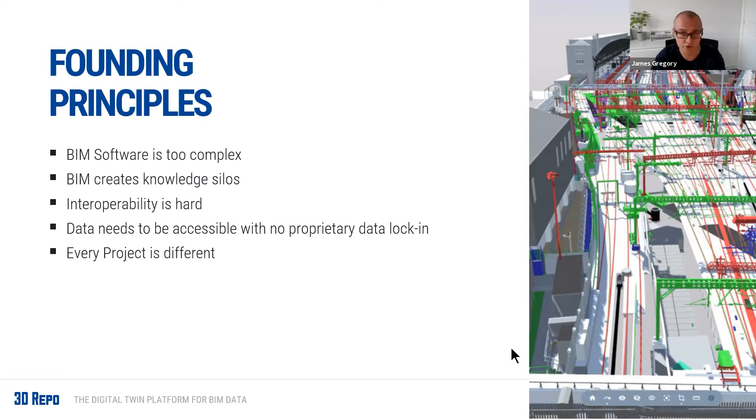Moreover, we see every project is different, but we need to be able to make simple decisions using simple solutions about different types of projects, whether it's rail, road, buildings, or infrastructure. Every project has a different set of requirements and different needs, so we want to provide a simple communication and collaboration platform for all users on all types of projects. The 3D Repo platform is built with three core solutions.

The first of which is PlanBase. PlanBase is primarily used at early stage design and planning. It provides a web-based environment for 3D assets, should they exist at that stage, to be opened up to communities for review, comment, and whatever is needed at that sort of early stage of a given project.

3D Repo IO. This is our core offering and what we're going to talk about in more detail today.

So I'm going to leave the slides regarding 3D Repo IO for a few moments.

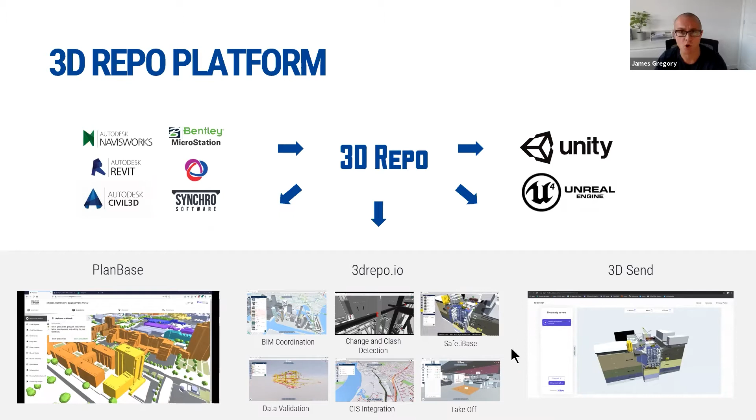3D Send is another one of our core products. It's a free to use application, jump on our 3D Send site today. It enables users to share BIM models and BIM files in a fully secure and encrypted way, and also provides the recipient with a simple free to use model viewer. It's a great way to share models and enable other parties to view them quickly. We're also able to push our data through to engines such as Unity and Unreal, which opens up an unlimited amount of possibilities for what can be done with that BIM data in those different solutions.

As I've mentioned, being open and collaborative is really important to us. Our Open Web Service API is modern and has been connected to a number of different platforms and systems - you can see a plethora of those below. As long as the software vendor at the other end has a good API and is prepared to open it and work with us, we've not seen software come across our desk yet that we've not been able to connect into. So if you need to connect data to other platforms via 3D Repo, that's bread and butter for us and what we're trying to deliver here.

So data consumption - how do we get data into 3D Repo? There are three core solutions or workflows to bring data in. The first is with our plugins. We have most of the main authoring tools that you guys are using and are familiar with, so if you've got these platforms, download the plugins and you can push data directly into 3D Repo from that authoring solution.

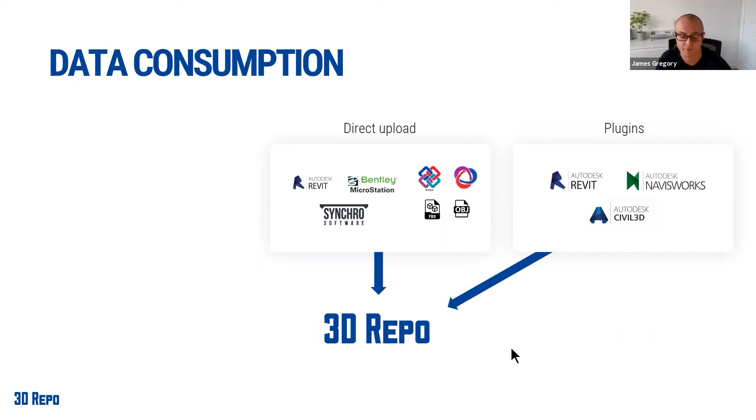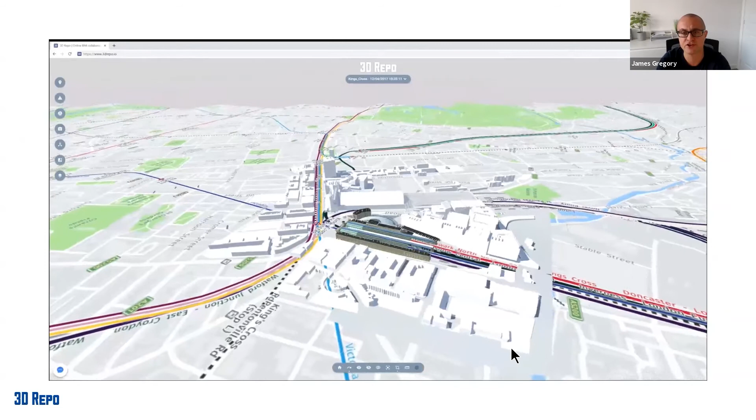Okay, so a little bit about the software. This slide gives you an overview and a simple insight into the user interface - nice and simple. We've tried to get as much of the model on screen as possible to make it interactive for users. Down the left-hand side we have the different modules within 3D Repo, and across the bottom we have the navigation commands, which I'll talk about on the next slide. I'm hoping that's not too jittery on your end - it's nice and crisp on my end. We've got quite a few attendees in the room, so there's maybe quite a lot of strain on the bandwidth, but I'm hoping that wasn't too stuttery.

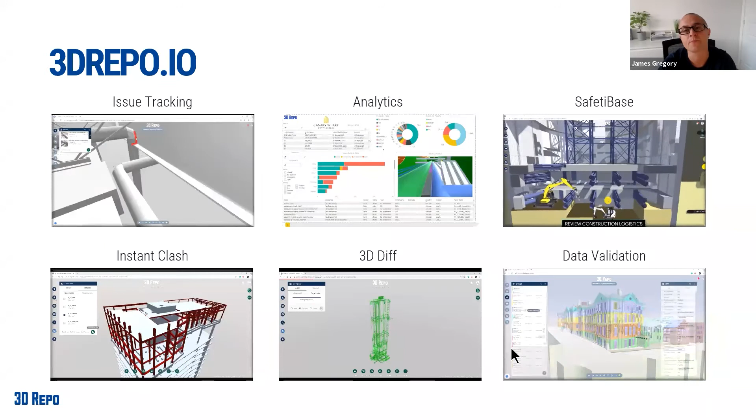Okay, so 3D Repo IO, our core offering. Here are some of the different modules and things you can do within the 3D Repo platform. Issue tracking for communicating issues is fundamental to us. The ability to clash detect models - bring native models into 3D Repo, federate those models together, and understand where there are clashes within them. We can then use the issue tracker to communicate those issues out to different disciplines and parties to resolve. Our 3D diff module enables different revisions of models to be compared - what's new, what's changed, what's been removed, what's been added - and we can see that in a nice graphical interface.

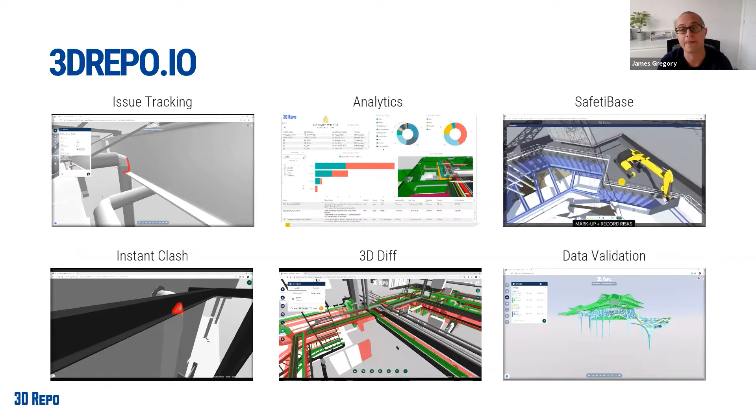Our data validation solution enables the data within our models to be validated, finding issues that may exist within those data sets compared to the standards and requirements, and communicating those issues out via our issue tracking solution. All of this feeds directly into analytical platforms - here you can see some Power BI dashboards consuming data from the different modules within the 3D Repo IO platform. Now, SafetiBase is where we're going to spend most of today's session, and I'll talk about that in a few slides' time. Security is very important to us - we are ISO 9001 and 27001, and we also hold Cyber Essentials.

I believe we're the only BIM software vendor to hold all 3 of those accreditations. Moreover, all of our software is developed here in the UK, and all of our data is primarily hosted here in the UK. I'll talk about hosting a little bit now.

3 options: we can host in our London AWS environment, which is our standard offering. We do have servers in Montreal for customers within those regions. Alternatively, we can install or deploy 3D Repo into any cloud provision, be that AWS, Google, or Microsoft Azure. We can also offer an on-premise solution in an air-gapped server environment, should you so wish.

Some of our customers range from clients to principal contractors, design teams, engineering firms. So if you guys fall into any of these categories, reach out to us. We can talk about the work we're doing in these spaces and see whether there's synergy with your company, your processes, and your workflows. Okay, so let's now spend a bit of time on SafetiBase.

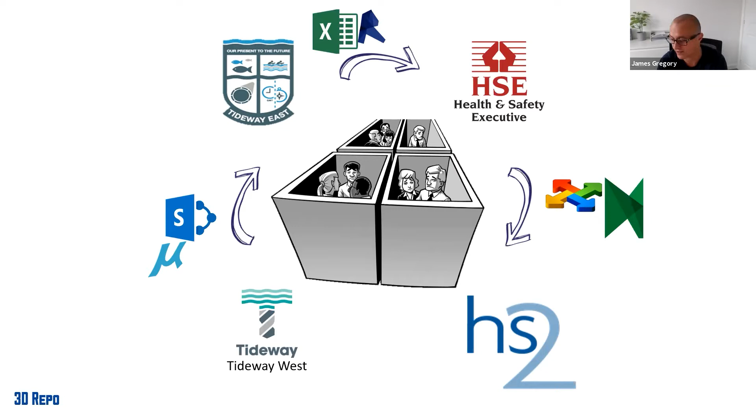And what that meant was that information was not transferable or interoperable. So lessons from one project couldn't be learned on another project. Treatments to certain risks identified on a given project couldn't then be used to treat the same risks on another project. So what we needed to build was a more structured, more connected, and simpler way of categorizing, defining, and managing risk information on complex construction and infrastructure projects.

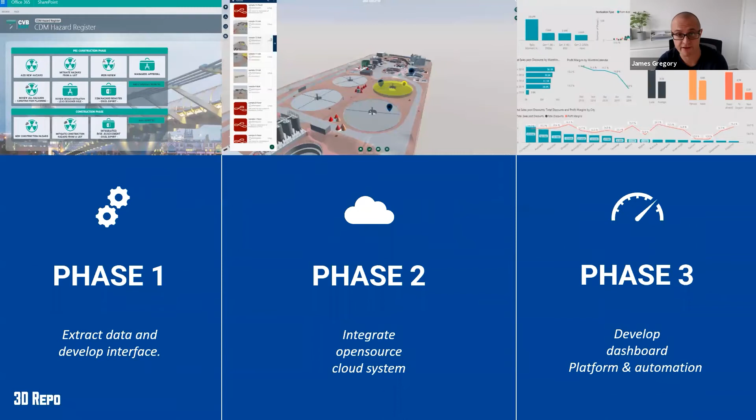This project took 3 phases. Phase 1 was to understand how do we extract the data and develop simple interfaces. This was originally a SharePoint solution. Phase 2 was how do we now build that into an open source platform, into a cloud-based system within the 3D Repo IO solution.

The third phase was then how do we connect all of that information to dashboards so that different stakeholders on projects were able to view the data and make decisions in a much more coherent fashion. We were quite lucky that during this project, PAS 1192 Part 6 was released.

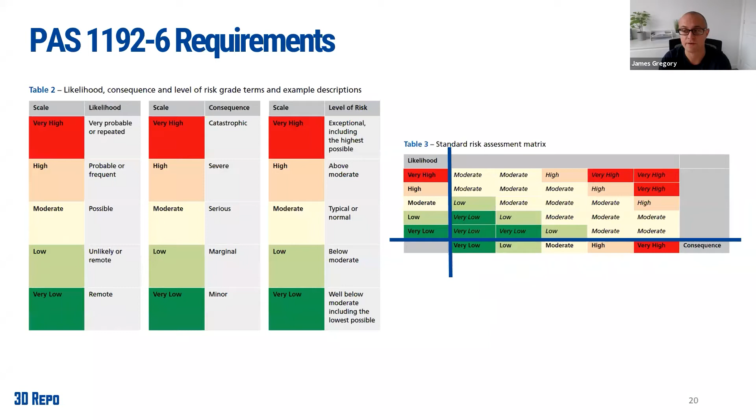And this gave us a real clear and definitive way to categorize and standardize risk information across projects, across the industry. We built this into SafetiBase, and SafetiBase now follows this process.

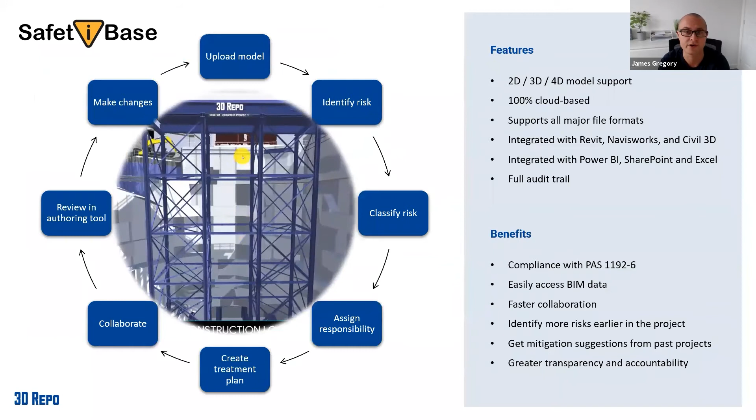And this is the process that Bogdan will demonstrate to you shortly, where essentially we upload a model, we identify risks, we classify those risks in alignment with PAS 1192 Part 6, and we assign responsibility of that risk to a particular individual, discipline, or company.

We create treatment plans or use existing treatment plans from industry, from other projects. We collaborate around that risk to find the best resolution. We review that risk in the authoring tool, make the necessary changes, upload the model back to 3D Repo, close out that risk, or push that risk back through a different workflow should we not have been able to resolve it first time round.

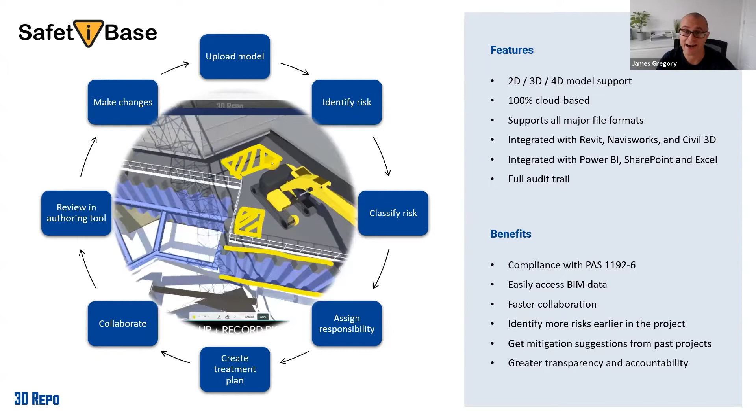Some of the features and benefits of SafetiBase: we can work with 2D, 3D, or 4D model data. We are 100% cloud-based, so you can access the platform and your information anytime, anywhere. We support all major file formats and integrate with a number of the leading authoring tools that I'm sure you guys are using on a daily basis.

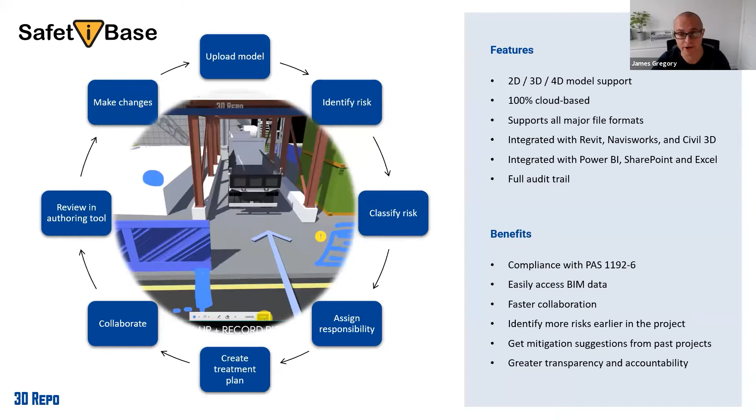We integrate with the likes of Power BI, SharePoint, and Excel and others so that data can be presented. But moreover, we're providing a full audit trail of that data, of those decisions - what happened, why, where, when, and by whom. Some of the benefits, as I've mentioned, include full compliance with PAS 1192 Part 6.

We're making it nice and easy for people to access BIM data when they need to. We're providing a much faster way to collaborate between organizations and between disciplines. We're providing a solution to identify risks much earlier on in the design and development stages of a project.

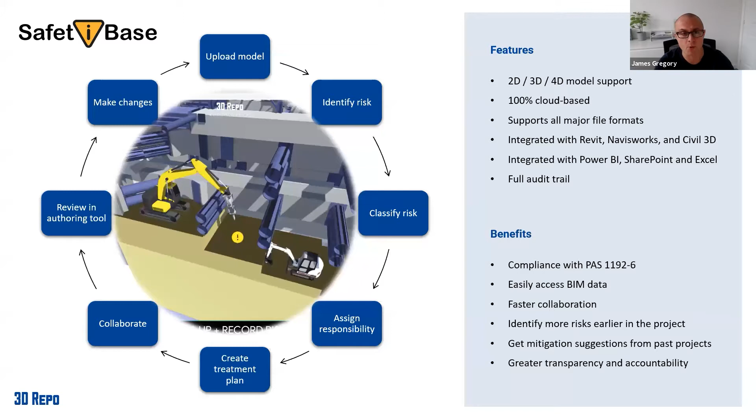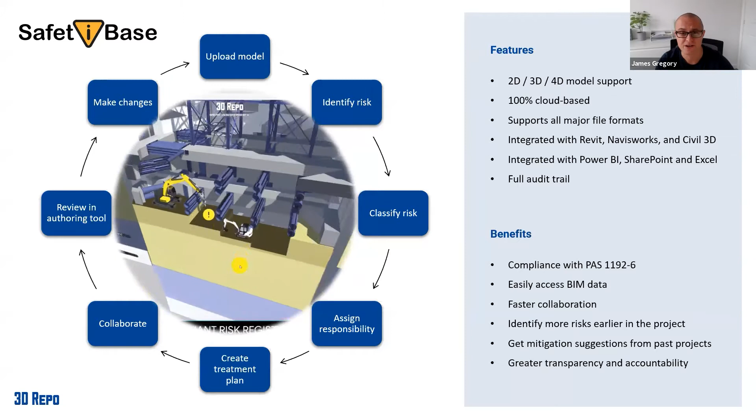But we're also providing a solution to get suggestions to mitigate risks from past projects, providing greater transparency and accountability, all of which are really important with the Building Safety Bill and the Golden Thread initiatives that are now becoming more common throughout the industry.

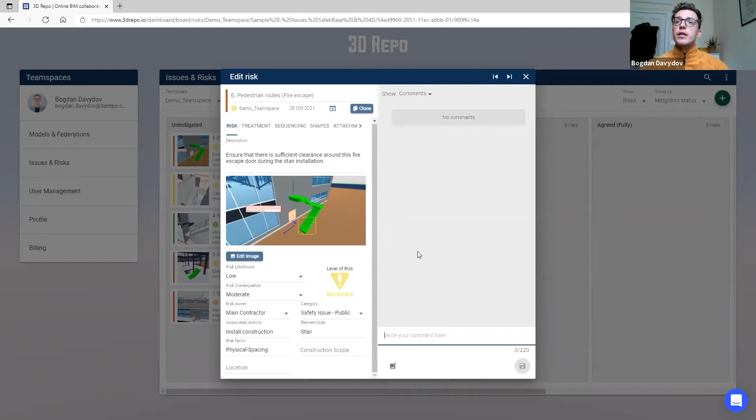Is there anything rejected, agreed, or anything unmitigated, right? When I'm in this environment, what's really convenient is that I can easily see what's going on, right? I don't have to spend hours trying to figure out which cell is what and what risk is associated with it. All of the information about risk resides here. Any kind of comment, subsequent conversation from that actual risk identification happens in here as well. So it's all centralized.

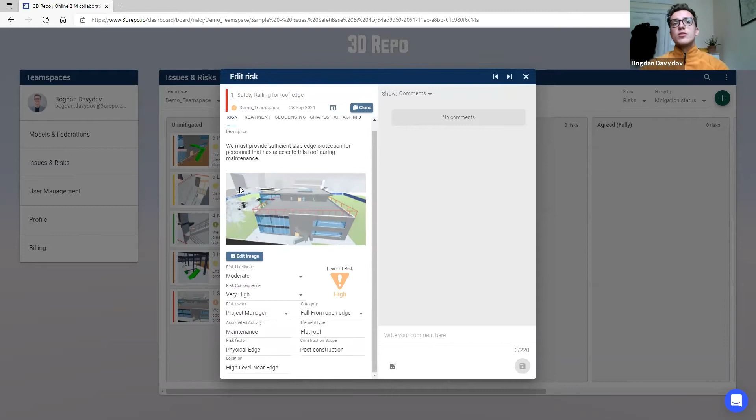You don't need to send emails and then mention to somebody, oh yeah, have a look at that Excel spreadsheet, and then they forget which one it is and where it is. Everything happens here under one roof. As you go through things, you can easily see what they are, where they're happening, and open up to see if there's any screenshot or anything like that.

Should the person be working on site or elsewhere, they can also share information with you as well. They can maybe upload some site pictures, do some markup or anything like that.

Notice that the environment is not a steep learning curve, right? We're all familiar with the likes of Facebook, WhatsApp, Trello. So why do we have to reinvent the wheel? Why don't we allow the 90% of the team who struggle with BIM processes to go through such a complicated and steep learning curve? Why don't they just open it and be familiar with the process, be able to comment, tag somebody, identify anything, just have a general conversation like you always do in any other application.

And then whilst you're here, you can save some time, maybe drag and drop things and identify them, maybe have a look at the actual issue again, maybe see what's happening there. Now, this is plain and simple.

This is me just saying, okay, I'm going to take my first step and say let's move away from that monotonous task of losing sight of which cell belongs to which column in the Excel spreadsheet. I have everything in a nice dashboard here that actually conveys the picture of the project at this moment in time quite nicely. Now, how else can I capitalize on it?

Well, actually, since PAS 1192 Part 6 is emphasizing for us to focus on BIM and make the most of it, let's actually make the most of it. If we do have access to 3D models and we can review these risks in those 3D models, let's do that. So the number one issue we have is that not everyone has access to maybe those files.

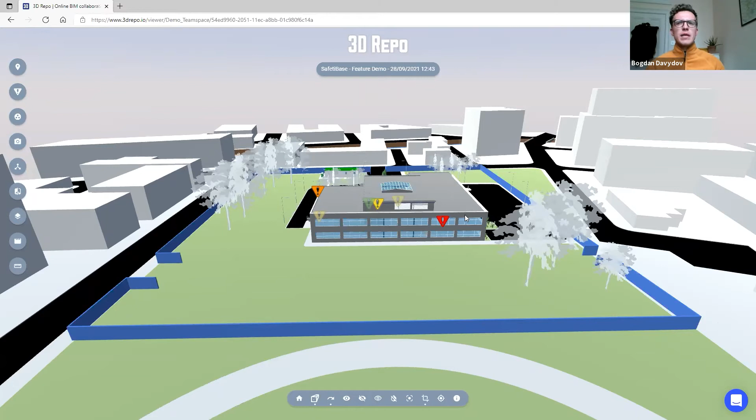Even if they do, they don't have that £2,000 or £3,000 license to open the file in the first place. So once again, your entry points are quite expensive and also quite time consuming. You have to go to your IT to ask to install, forget about it. Let's keep it simple.

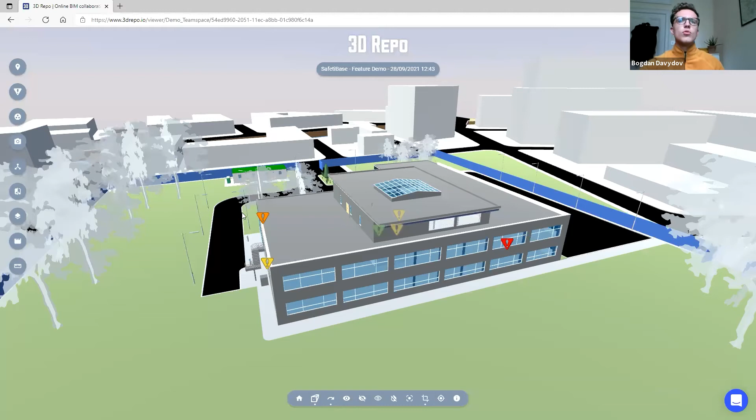All I have to do is just follow a URL link in the web browser, and there I have access to all of the risk information that I saw in my dashboard, but now it's associated with a 3D model environment. So now we're getting a step closer to that industry standard that this is the way forward, and we can actually make the most of it.

And I no longer have to have, let's say, a Revit license to create some sort of beacon and drop it in there and have it fixed. No, I can easily come in here, move that beacon, add a new one, add a comment, whatever it is, and we all work remotely now. We can't be in the same room, so that's exactly what I'm doing.

I come into this environment, I notice there are some risks, I can filter them through this list, click on things and it will take me around, or I can navigate around the model and see there's a risk pin, click on it, and it will take me there.

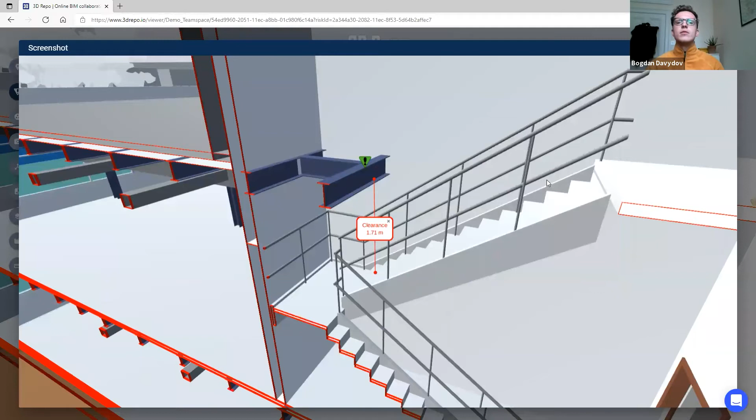Now, the real benefit of, okay, let's say I do have access to this 3D model - the real benefit is not about you just panning around and thinking to yourself, oh, isn't it fancy? That's great, right? So we already resolved one of the biggest problems: the information exchange.

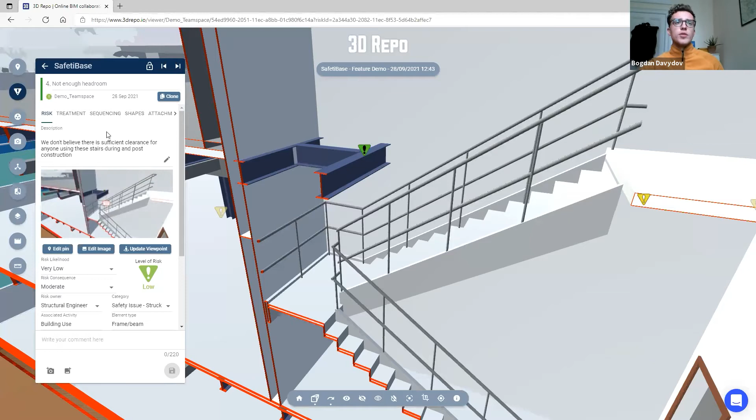We send an email, we forget to CC somebody, somebody leaves the company, nobody responds to it, or something else happens along the way. Those issues are in the past. Everything is here. You know exactly what the risk is, you know exactly what they're talking about, you know exactly what kind of associated activity might be happening or element type it is. If you have any comments, you can add them, you can say, okay, I will take a look at this now.

I'll add that as a comment that will be logged in the system. There's a full audit trail. Even if I fall ill next week, somebody can always see what's happened and pick it up from here onwards.

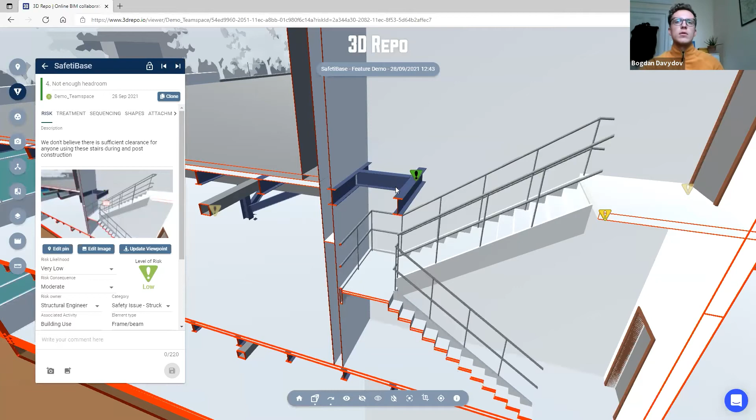The real benefit is that since I have access to this 3D model, this is where you really start resolving your risks. You're not just looking at standard 2D drawing sheets and thinking, well, what else can we do with it. If somebody points out that there's a beam that is not positioned correctly, somebody might hit their head, or how do we do anything else around it?

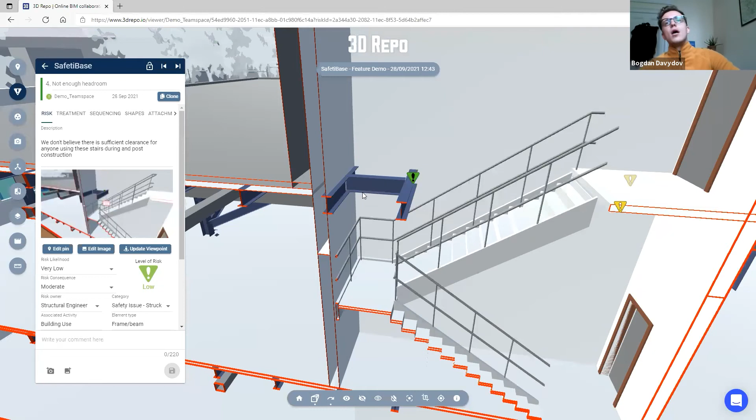I can also leverage the ability of interacting with this model myself. I might capitalize on other features that we have. I might use my groups to help me understand where things are. I might want to say, well, where is the structure actually in this building? I can then see what's happening with it.

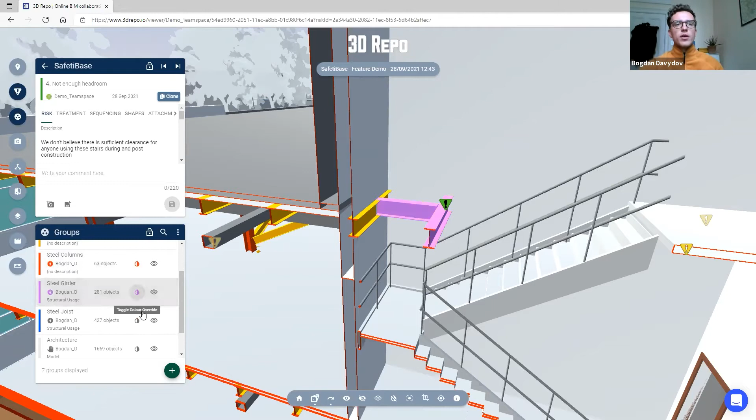Maybe I want to say, well, hold on, this is a bit complicated, there's a lot of structural elements floating about. If we move this beam, how else does it affect everything else? I want to have a look where the steel beams are and how it's connected with columns. I might want to go even more granular and say where the girders are and where the steel beam joists are, so we then see the exact structural components from their purpose.

Whilst I'm in this environment, I'm only a few clicks away from getting more information out of it. If I want to know more, I can click on an element. If there's BIM data, it's all in here. I can actually learn about it more.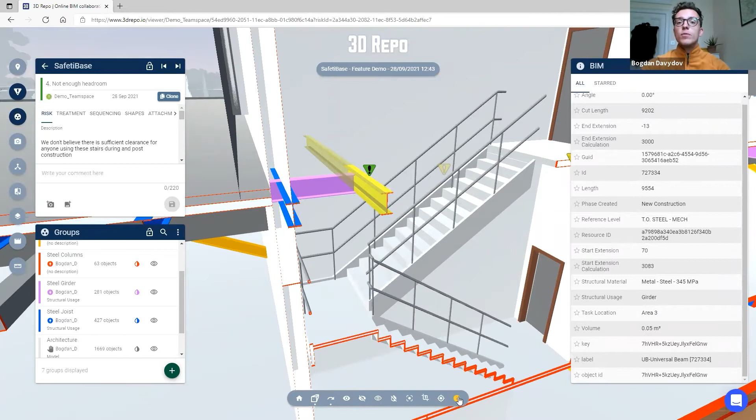If I want to change my view, I can assign my actual clip plane, cut it elsewhere. If something gets in my way, I click on it, hide it in view, maybe hide that element as well. Instantly I get a bigger picture and a better picture of what is happening on this project.

If I have a further comment, I might go and add a screenshot in here, and then say, have a look at this entire junction, it looks a bit messy to me, have a look here. So I'm going to add that as a comment.

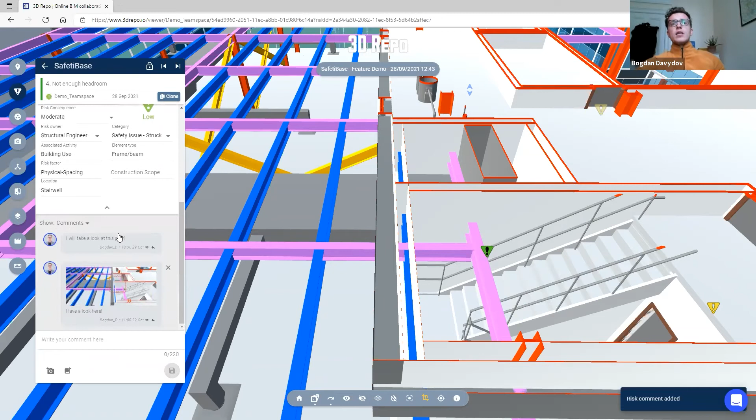What's really nice is that whoever's working on this project, let's say they open this up for the very first time, and we remove all of our fancy views and things. If I come into this environment and see this risk, if I notice that there's a comment made, I don't just get a fancy screenshot and find myself in the same pickle of trying to scratch my head and think, well, what is it they're talking about?

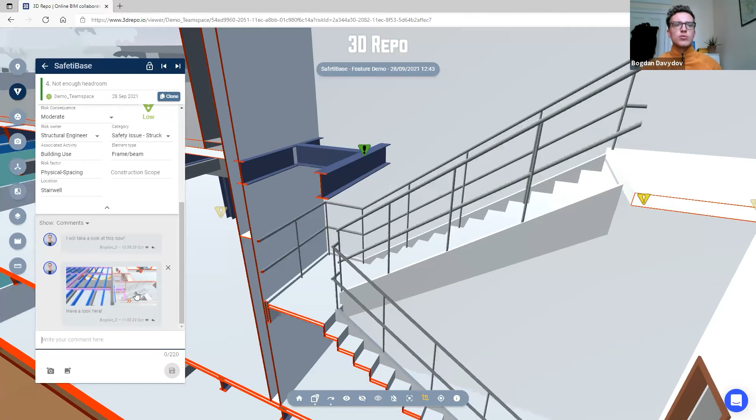I can go to that comment, I can actually go to that same view, and that's powered by the fact that I still have access to exactly the same information the other individual had access to. So within a few clicks, I'm able to get straight to the point. I think those time-saving moments are so valuable when you're mitigating risks and trying to resolve things on site.

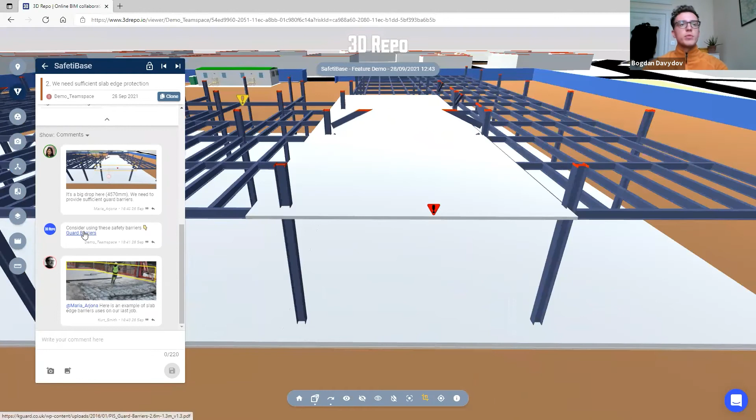One of the other things you'll notice is that when I click through these risks, the views change a lot as well. In this particular use case, there's a lot of conversation happening, a lot of information exchange, people are exchanging documents, and I instantly know what it is that they're talking about. There might be something else associated with the risk or something like that.

What's really nice is that since we're working in this environment of identifying these risks and following the industry standards, because everything else you submit in here is industry standards, and everything can be predefined by your team, what's really great is not wasting time and capitalizing on it.

Should I encounter a similar risk to do with slab edge protection, fearing someone's going to fall from the edge during slab construction, I may go back to my database and ask 3D Repo, have we encountered something like that in the past and have we resolved it successfully? Instead of waiting for that bi-weekly meeting to discuss this, get the ball rolling already. You can query our database and say, oh brilliant, we had exactly the same issue a couple of years ago. Our database picked this up, and then we can say, well, we're looking at detailed design and actually reducing this. Okay cool, maybe let's go with this.

Once I do that, it automatically populates my fields. How much information you have there is entirely up to you, how much you choose to input and take out through the 3D Repo database. But once again, I'm not wasting time. I'm leveraging this information that I submit day in, day out across multiple projects. Why do we have to reinvent the wheel? Why can't we just use the same approved method of risk resolution from the past instead of talking about the same thing again and again?

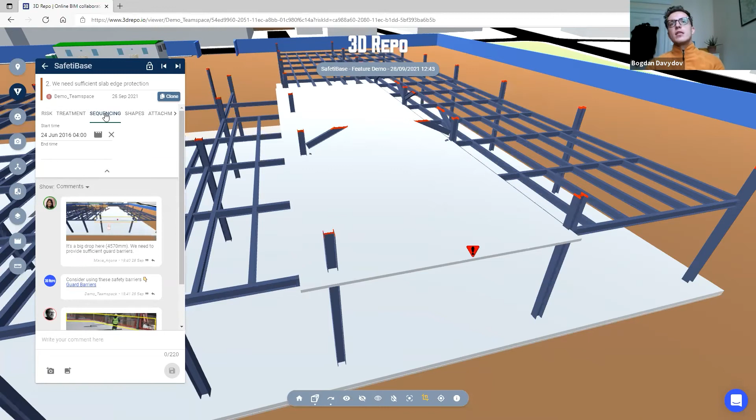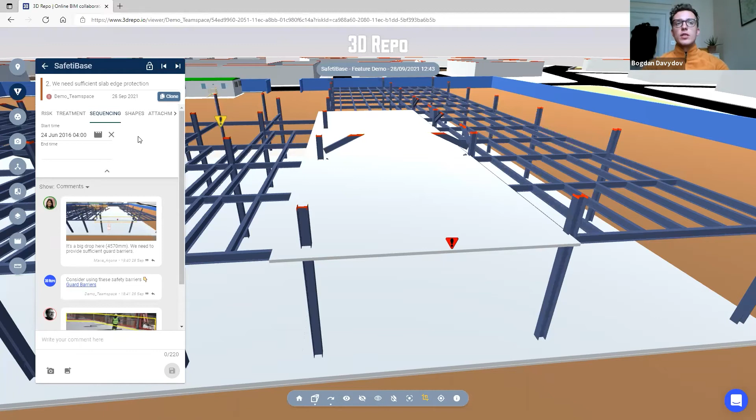Now, what's really nice as well, since our latest development going into the 4D analytics of models and animations, you'll notice there's a new tab in SafetiBase called sequencing. That means risks may well be associated with a particular time in the construction sequence. And what's really nice is that this may be associated with a 4D model that you can push to 3D Repo as well. How I know that is because it's associated with a sequence—it's not just the time, it's actually a sequence associated with it.

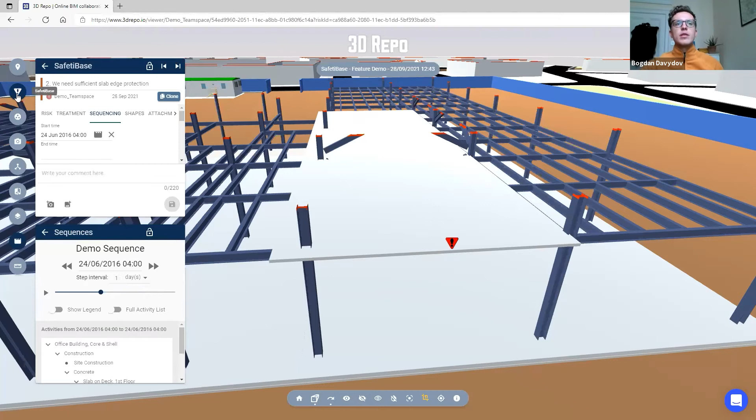So with just a click of a button, I can learn more about it. I don't have to wait for a week to get a Synchro specialist to open the model, find that actual sequence and show me more about it. As an absolute BIM novice, I can just click on the button and it will tell me more about the sequence happening at that moment in time. I instantly know, okay, that's to do with slab deck, or maybe I want to know more about it—I click on it and it tells me when it starts, when it finishes, what kind of constraints or status it may have. So within 3 clicks of a button, I can understand more.

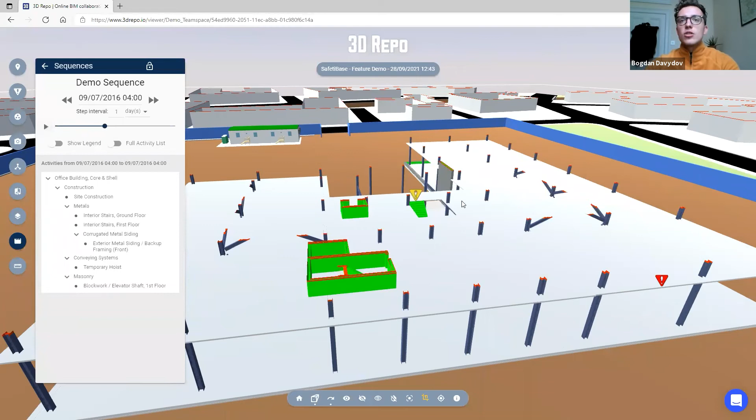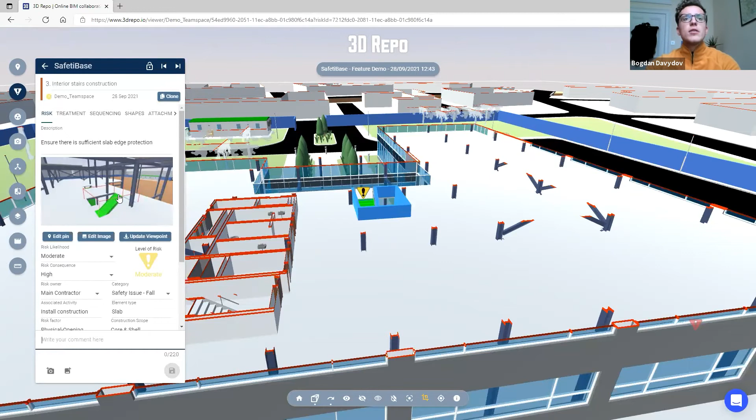But what's really nice is that I'm not just getting information about all of this, I can actually process it further. I can play back that sequence and see, well, okay, if we have this risk, how else does it happen, and where else might we encounter this? I see there's slab pour everywhere, and as you navigate around the model, you may notice that some risks start popping up. So for instance, if we go back to the SafetiBase list, you can view it here, or through the pins located around the model. You may notice that as we play back through the sequence, there's a new risk that we think might be happening there. When we click on it, it instantly notifies us, so we know exactly what it is.

So that's the real benefit. It's not just reviewing risks by looking at a flat list of risks, it's also reviewing risks by scrubbing through the timeline or the sequence. You can choose any moment in time, any interval, but essentially what you're able to do is capitalize on the model information exchange, whether it's a static Revit designer's model, or an actual construction sequence program from, let's say, a Synchro modeler. You can bring it into 3D Repo and make the most of it.

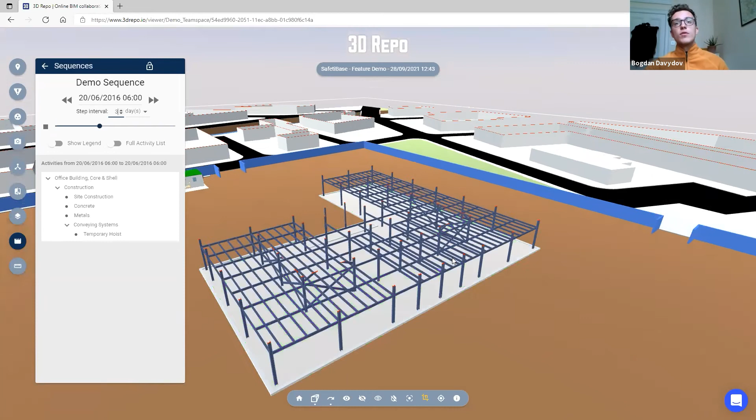You will identify your risks during early design stages. You can even do it in pre-construction or during construction. But as your sequence plays back, you can learn more about it, or see if there are any risks associated with those, so that now you're actually connecting more than just a BIM expert team—you are connecting a team that may well be on site, who gets a pre-construction meeting together.

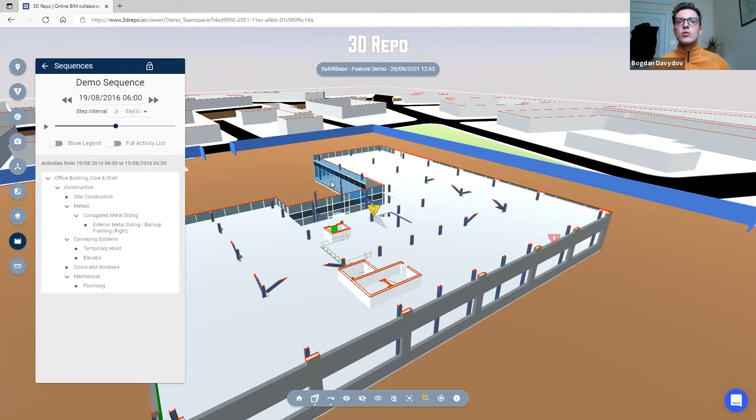They can all log into 3D Repo, see what's happening, try and resolve the risk, maybe click on a button, and we'll take them to the actual risk and then show them what's happening in there.

So that's how you use SafetiBase in 3D Repo, and that's essentially how it helps you to speed up your processes. But most importantly, unlock the most important feature which is the BIM models themselves. Most of the time we're encouraged to do those, but when we spend so much time developing them, it would be a shame not to capitalize on it and share with the team that should comment back on any kind of design progress or any kind of risks you may identify.

So that's us working within the 3D Repo environment. I showed you that's all great. You create all of that data, you can see it however you want to. Now, that's bringing information into 3D Repo and making this your centralized hub. How can you capitalize on it to make sure that others can benefit?

First and foremost, you can benefit from it by simply having access to it. You can actually find out what the team is talking about and what the team is trying to evaluate. Second of all, you can easily see where things are, where things stand, where they're heading, and stuff like that. And if you want to, you can easily report on those things as well.

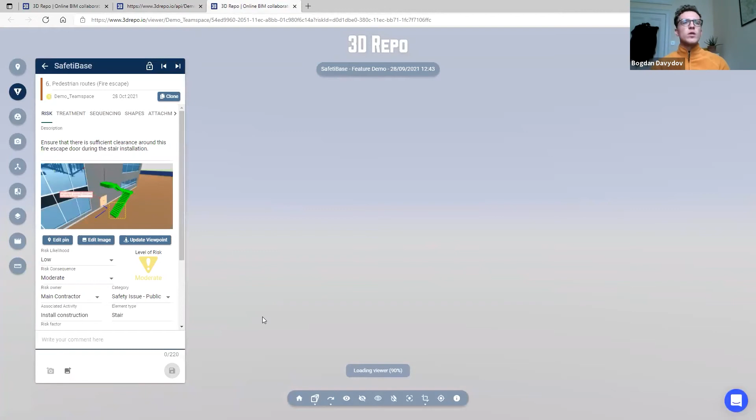You can create PDF reports or anything like that, send it to the team. The brilliant thing is, if they receive this report, they're only one click away from actually seeing it in 3D Repo. I can just click on this button and it will take me to that URL link. So within one click, I can see both my risk information and my model as well.

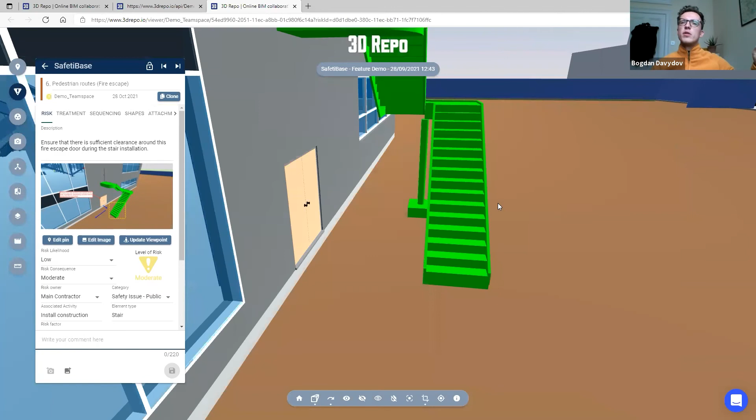So notice that I no longer have to spend 10 minutes trying to understand where is this model in my common data environment that I have to download. And oh my God, I don't have an application to open it. So I don't waste my time. I can see exactly what's happening in here, what the risk is.

Within a few seconds, I'm able to quickly comment back, and maybe the person modeling this building can quickly change it in Revit or whatever tool they're using. So that's one of the ways that you can bring information out. There's another piece of information that you can bring out and make the most of - the actual risks themselves. You can evaluate those elsewhere.

So for instance, if I happen to have a different file format and I'm working in another application and I want to see those risks there or comment back on those, I can do that as well. I may have a different project I'm working on, and I may have a model for it as well. I may use 3D Repo just to log my risks and things. I might not have a 3D model in 3D Repo, or I may do as well.

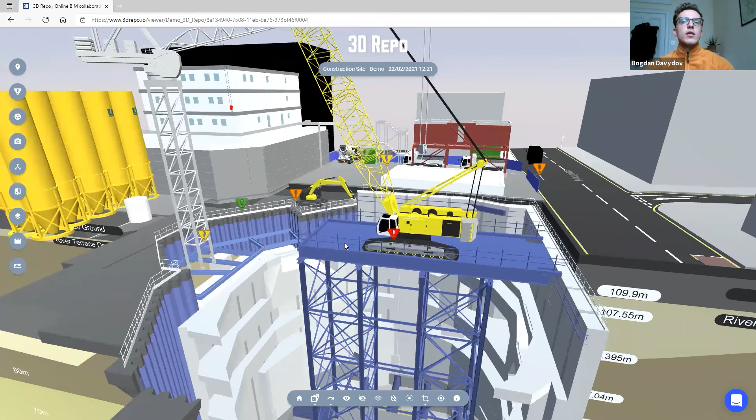But essentially, the real benefit is if somebody does have access to this exactly same environment. So for instance, if you go to another team space in another project, I'll show you that, in fact, there is another project I may be working on at the same time. And I may well open up my model and raise some risks and things. But what happens to somebody who may be using another application?

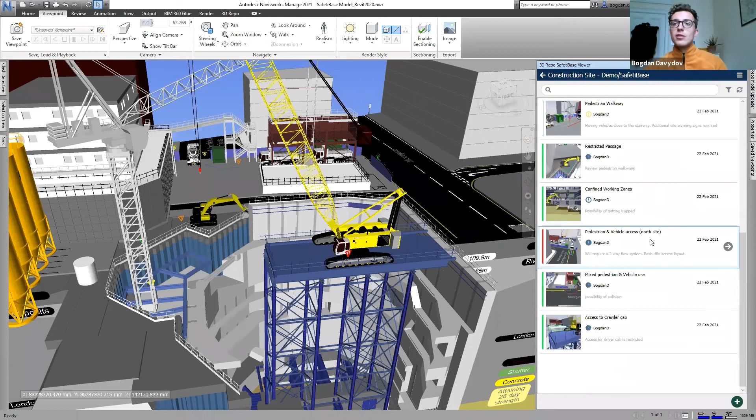Well, they can bring those down. They can make use of our plugin. This plugin is very handy because it gets access to 3D Repo. And if I refresh it, it pulls all of the latest information, and I can go around my model and evaluate all of the risks identified in 3D Repo, but now in another application. And not only have access to all of the information exchange, all of the comments, any kind of resources, maybe some people sharing links or PDF documents. I also have access to my treatment suggestions from here as well.

So as I pointed out, we're creating this central hub, but we're not creating that central hub where you have to use that or nothing else. We're creating a central hub that you can have access to through whatever application you're using.

So I may be working in Navisworks, and I may want to raise some risk, and I may want to understand has my company witnessed something similar in the past, and are there any best ways to resolve it? Let's maybe propose that to the rest of the team. But now I'm moving away from that annoying exercise where only I can place this pin, then I issue my model, and if somebody has a comment about it, they can't move it, they can't comment back, we have to wait for a meeting - forget about it. That's a thing of the past that is completely inefficient in my opinion.

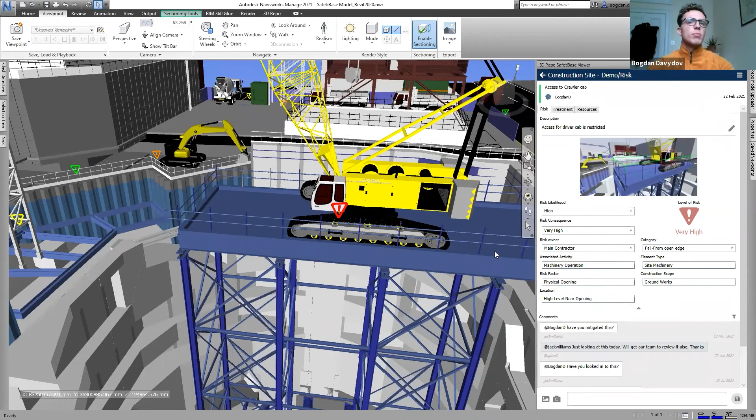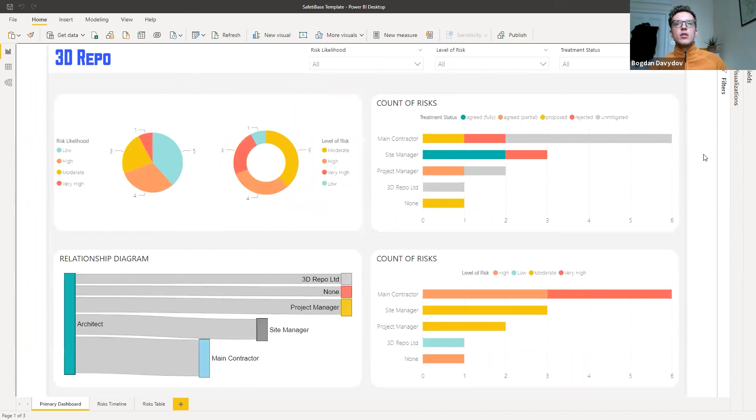Another use case is to report on these things - I may want to look at this project outside the 3D Repo environment, in my choice of application. I'm only one click away. I just click refresh, we make an API request to 3D Repo, and pull down all the latest data. If there's any data change, you'll notice a few things have changed.

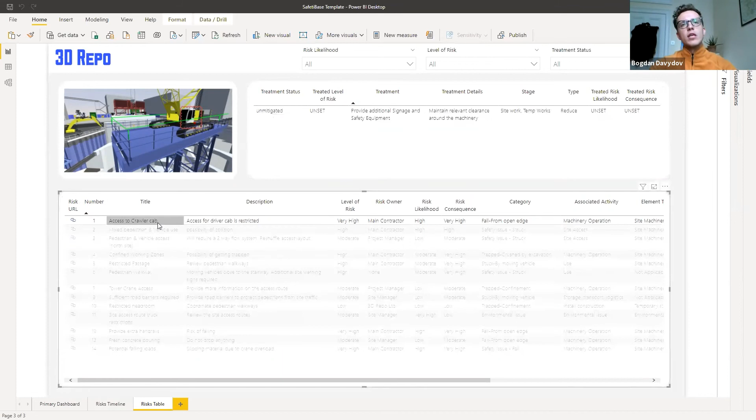But then you can drill through this information in whatever other application you may be using. If I don't like working in Excel, or want a better analytics tool to understand where these risks are happening, or how much resolution has happened that I'm not aware of, you can do that too. That could be Power BI, or Tableau, or whatever application you want to use. The real beauty is, if I love using a business analytics tool like this and I'm looking at this risk, getting all this information, I can see exactly what's happening with it.

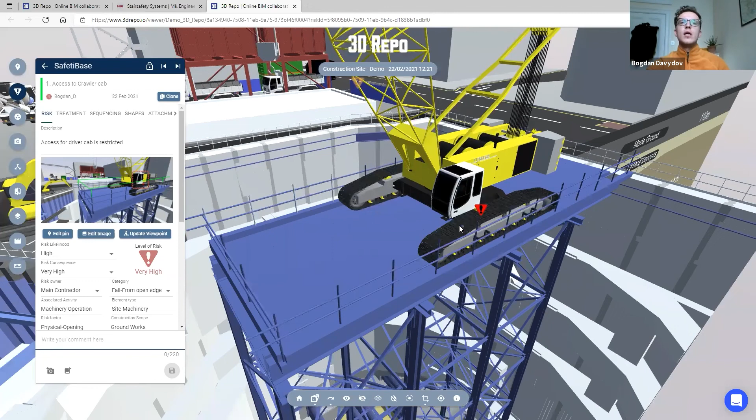If I want to learn more about it, once again I'm only one click away. I just click that button, and not only do I get information on the risk itself, I also get information on the model and context too. I don't have to go and ask my BIM manager to install some application, or spend half an hour teaching me how to open this simple 3D model and see this in context. When I'm in context, I can interact with it more.

I might go and say, well, let's have a look at how big this platform is - can we change the size of it or something else?

It's that responsiveness to evaluating risks that really benefits the whole process - not necessarily automating things for BIM professionals, but assessing it quicker by the rest of the team.

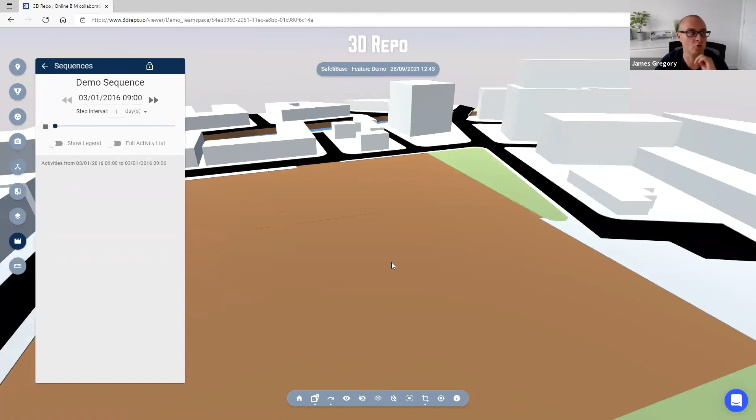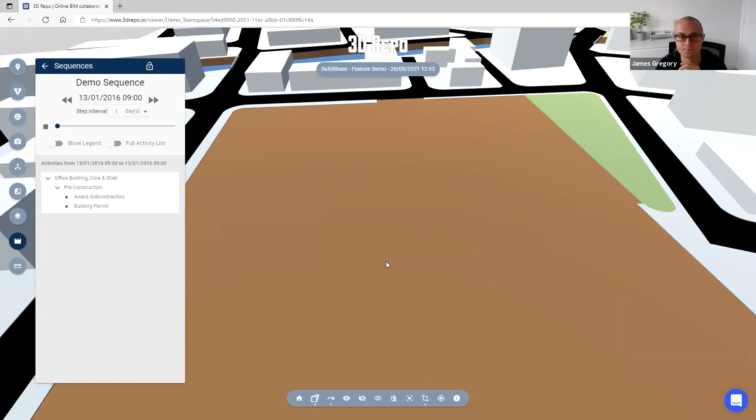Do we need to have Synchro for the 4D sequence to work? Bogdan, do you want to take that one? Yeah, sure - so currently we support...

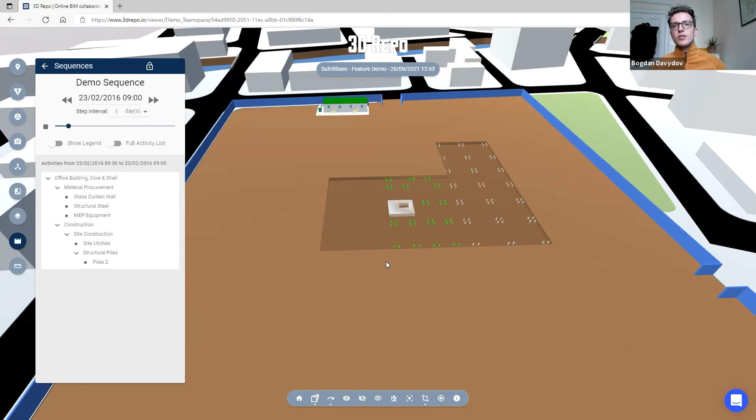Like maybe your timeline exercise in Navisworks or somewhere else. So essentially you can compile that information into a CSV or JSON document and push it through 3D Repo, either via APIs or an upload. So that's something I'd say keep an eye out on - we'll be throwing updates on that matter.

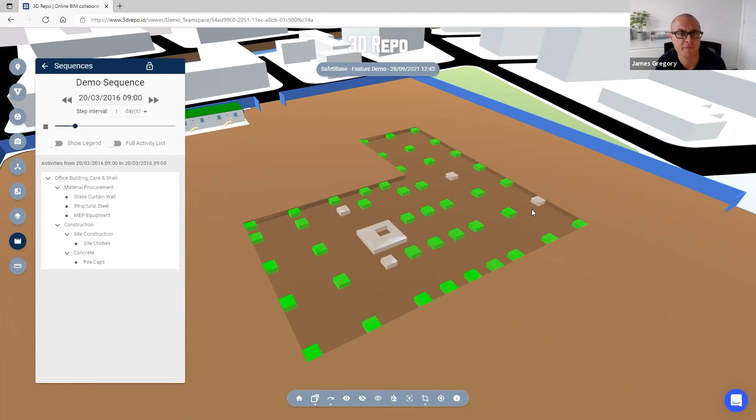Can I view or create risks from within authoring tools? Yeah, precisely. If I want to identify or create a risk within a design authoring tool, I have exactly the same capabilities. So if I zoom in on something and I'm not particularly happy with, say, the height of this concrete plinth, I can easily create a risk from here as well. I give it information like likelihood, consequence, who's the owner - all those drop-down fields are pre-populated, so people don't have to write essays. Sometimes they do, but you can just quickly choose things that make sense.

You can also add a markup. So if this is something you think is particularly important, you raise that as a risk, and save it in your design authoring tool of choice - maybe Revit, Navisworks, Civil 3D, or whatever it may be. That will become available in 3D Repo as well.

So if we go back to our 3D Repo environment, let me show you quickly - I believe this was the SafetiBase project. If we go to the Kanban board, that's quickest - we'll see that the risk I just raised has instantly popped up in the database. So the information exchange is instant and pretty much there on the spot.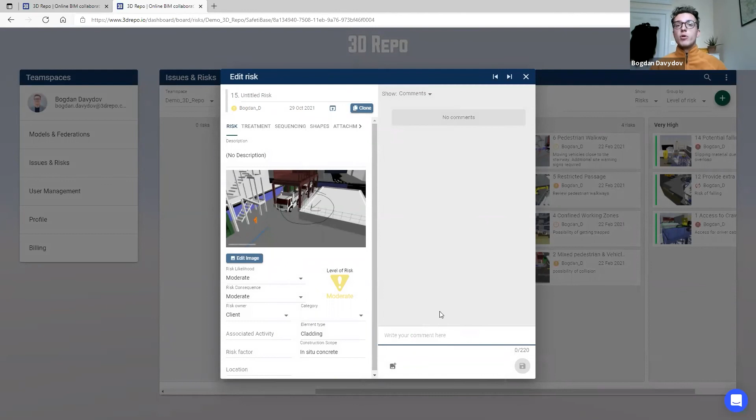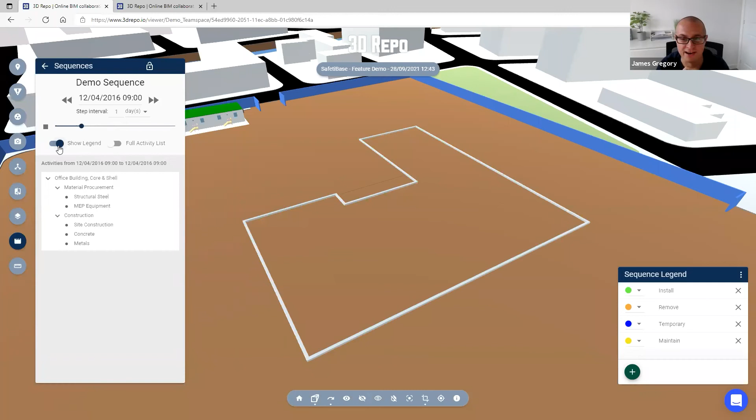Assuming 3D Repo will work with any open API CDE - yeah, absolutely. As I mentioned in the presentation, as long as the software vendor on the other end is open and happy to connect with us, then the options to connect with the CDE are absolutely there. The workflows and use cases generally get developed on a case-by-case basis - it depends on what that particular user or company needs from the connection to the CDE. We're happy to explore all use cases connecting to other platforms, not just CDEs. So reach out if you've got a particular use case, and we can discuss whether there's an option there.

Okay, what else have we got? There's a few more further up. Is it possible to automatically import our risk register developed within another software? We talked about 3D Repo with the Revit plugin, but can we import full risk registers, Bogdan?

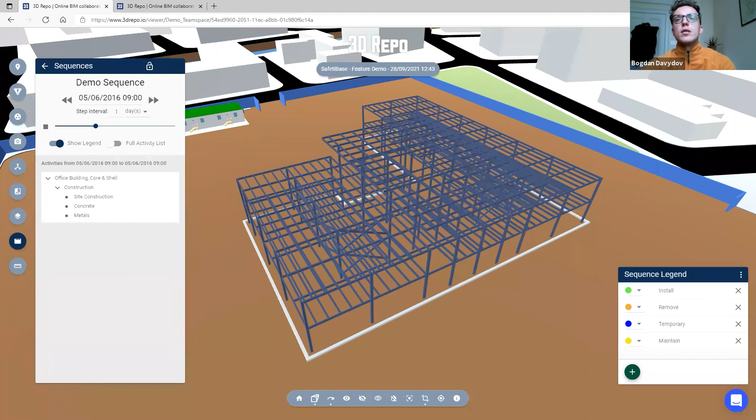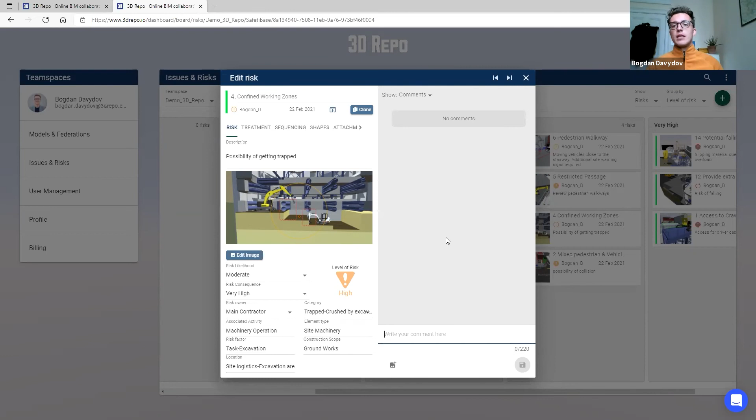Yeah, of course. One thing to be aware of is that the risk register in 3D Repo follows a PAS 1192-6 schema, so all the input fields are predefined as per the industry standard. We've had a lot of users migrate from traditional CDM risk registers or similar to the likes of SafetiBase. All they had to do is figure out which column relates to which part of the actual industry standard, and once that was done, we literally just published directly from Excel. They can develop their own macros if they want, or use APIs or other applications, various means like that.

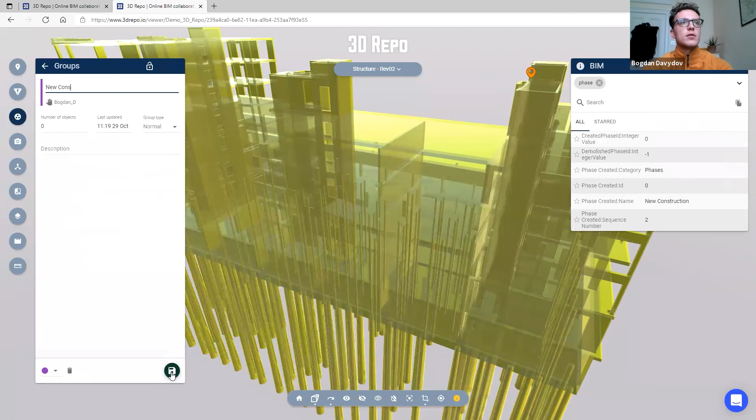Can you export Revit phasing to 3D Repo to support high-level 4D programs? Yes, most definitely, because all of the information resides in here. I'm not sure if this example has anything related to phasing, but if you do have information related to phase, you can use it for your own benefit. If I have a Revit model with data in it, and it has some sort of phase - say, phase created name, new construction - you can select elements based on that phase. In this case it only has new construction, but I might create a group and label it new construction - that's my phasing program in here. Using these groups, I can easily identify what is new construction and what isn't. The same can be done for any information embedded in the file, not just for a high-level construction program overview, but for a more detailed construction delivery on site as well.

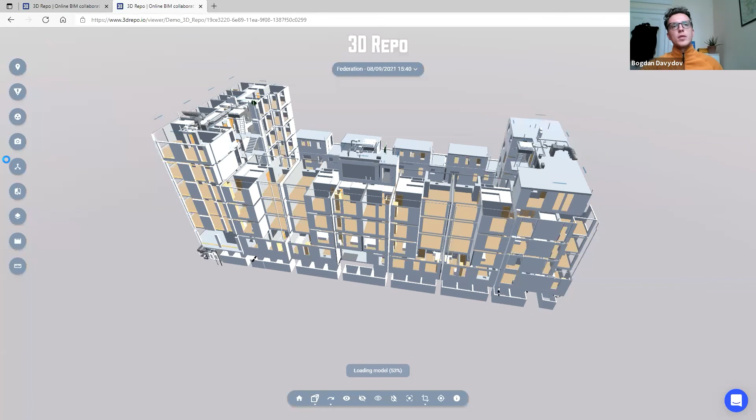So I'll show you a quick example - not looking at the phases within the Revit file itself, but construction phase information, which could be an instance or type parameter. Just bear with me one second while I load this model. Here's a nice useful example, right out of the box, to show you.

Let's say we might be looking at plant room installation progress. All of this could be based on the data that resides in our actual model itself, so we can find that plant room installation sequence in our BIM data, and then easily make API requests from external tools using iPad apps, QR codes, or anything like that, or even within 3D Repo.

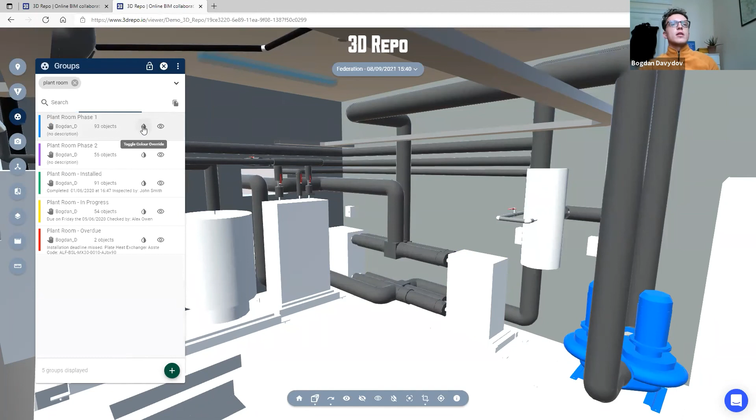Actually, let's have a look. Which one would that be called? That would be called plant room, right? So I'm looking for plant room. I can then have a look at information like what phase 1 of this installation is, what's phase 2, what's currently installed on site, what's in progress, what's overdue - this particular unit, we have more information about it. So all of that information can be interpreted however you want in 3D Repo.

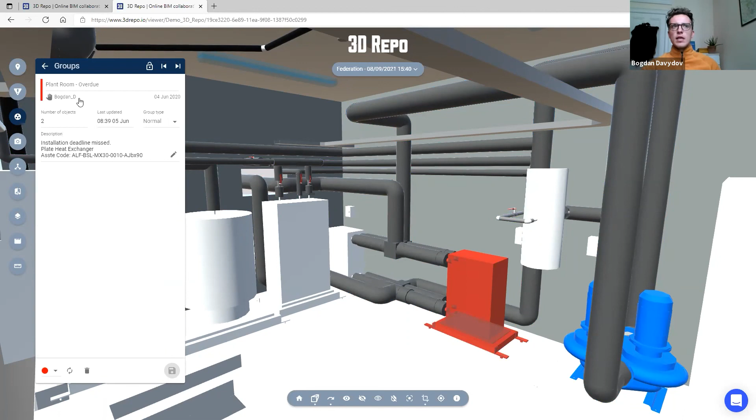But the real benefit is that once you have access to this, you can comment back on it. I can go in and raise a risk or an issue, and somebody can actually evaluate it. That's the benefit. Great stuff.

All right, time for one last question. I'm conscious of time, I'm sure most of the audience have probably got 11:30 meetings in their diary. So the last question: how was the 3D model built? Is it a real world building that has been 3D scanned on completion, or has it been built from scratch in Revit and then assessed for health and safety prior to build commencing? So yeah, how was the 3D model built, Bogdan, and essentially what's the use case for this?

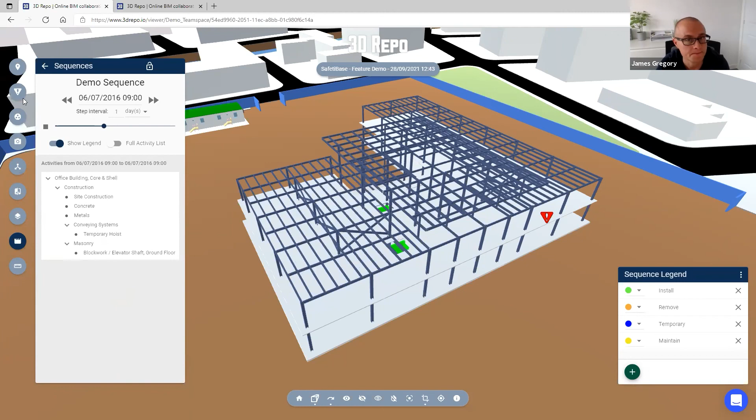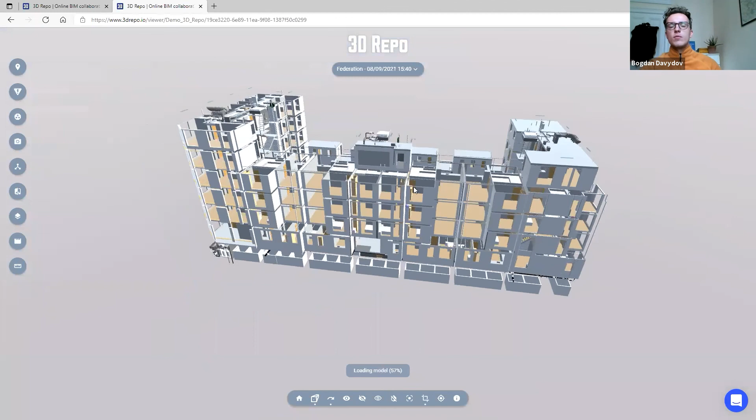Oh, well, it's entirely up to you, to be honest with you. You can build these models however you want. This could well be you inheriting a file and then building out this sequence in Synchro, and before you actually begin construction, you're just evaluating your construction program. It could be you inheriting Revit files - like I pointed out, these are designers' files, and then I'm evaluating what kind of delivery method or what type of materials they proposed, and seeing where things are. Like I showed you an example of me reviewing what the MEP engineer proposed in my plant room area. So you can use models coming from Revit, Civil 3D, Navisworks, IFC file format, whatever data format you have, we can consume it.

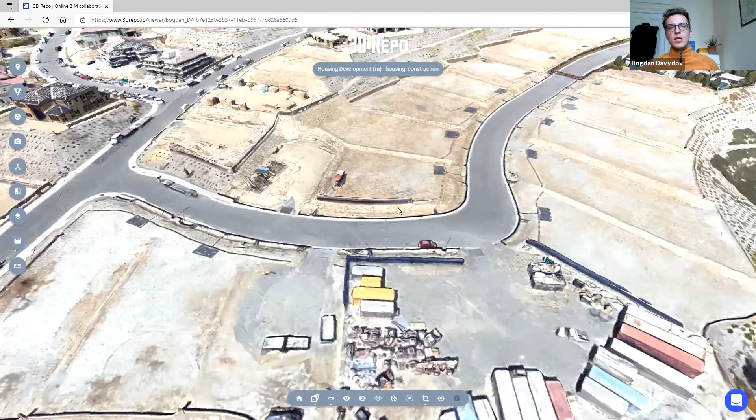Subsequently, if you do have some sort of scan or information like that, we have a few examples - for instance, some survey information. Let's say we might be looking at a housing development. It could be a drone scan going over, which they then took as a point cloud and turned into a mesh. So when you do that, you can go around and say, 'I'm looking at site conditions, I'm not noticing any restriction barriers or anything like that here.' If I'm not happy with it, I go into my environment, raise my risk, say where it's happening - in this location, it's a high priority risk, can you guys please review it. You save that, and there it is.

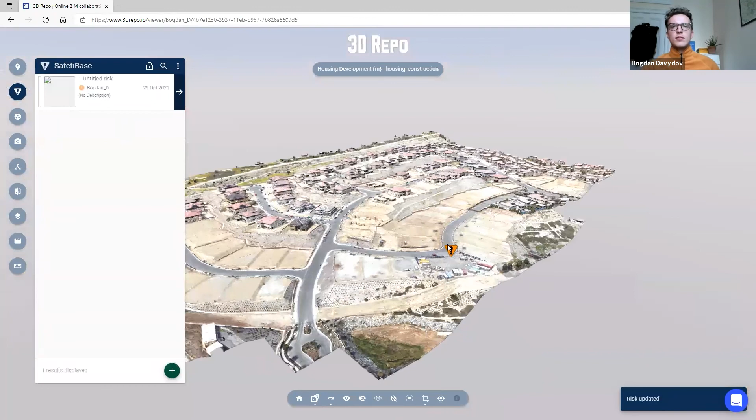And it doesn't matter to me which file format I'm working with. The main and most important thing is that I can bring it into 3D Repo, and then anybody can just open this file and start communicating. Great stuff, brilliant, okay, thanks, Bogdan.